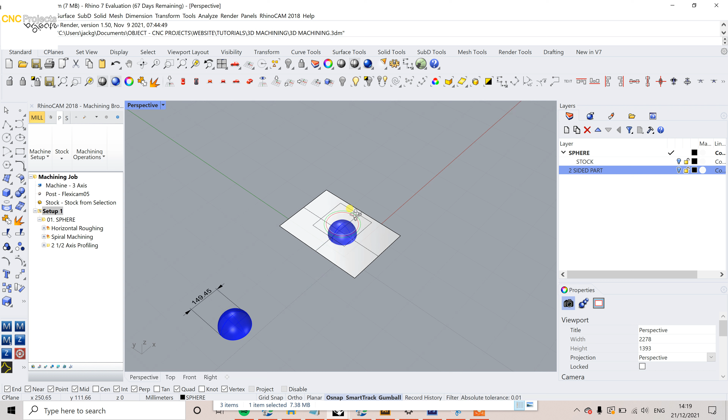So in this video, I'm just going to discuss a brief overview of 3D machining. Now, this isn't to say that I'm going to tell you how we machine the parts in 3D. There's hundreds of different ways you can machine a single part, but hopefully this video should give you an understanding of how we hold the part, why we need extra material, and just to give you a better understanding of what we require from you for those files and for the stock.

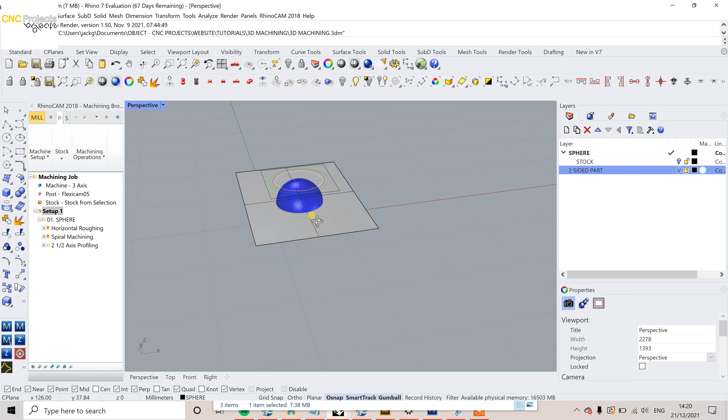So here I've just drawn a very simple semi-sphere, just as an example. It's not something we've cut recently, but as you can see, we're going to position this on the bed. Now, if we were cutting this from solid material, we've got to hold this piece down to our bed. Now, to do that, we often use mechanical fixings such as brackets and screws. If it was cut from, let's say foam, then you could just use double-sided tape and it wouldn't be such a problem.

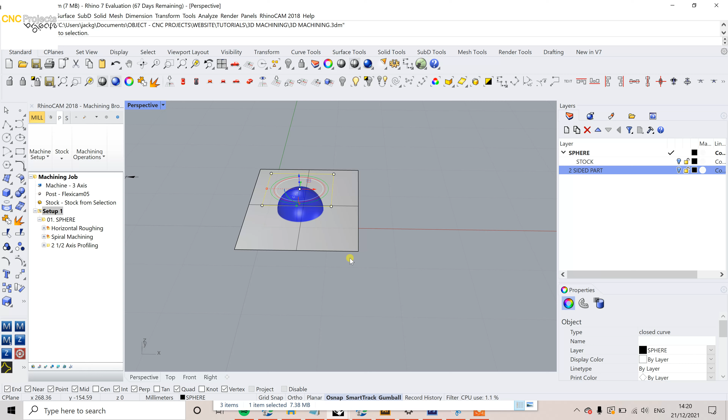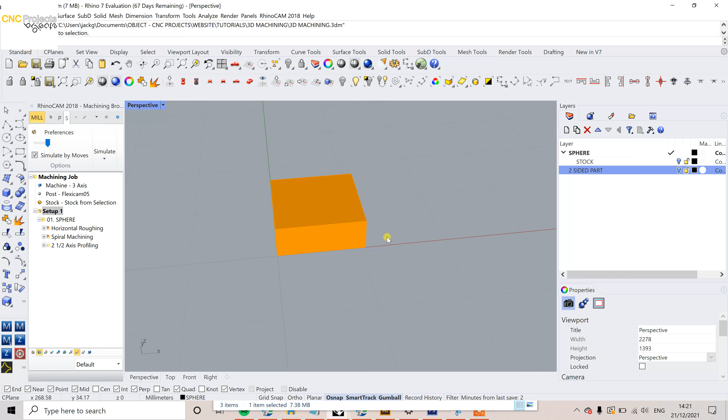But for a solid timber, the force that gets pushed through it when we're cutting is quite high. So we generally like to have a nice mechanical fixing in there to ensure that the part doesn't move around. So in here we'll have our piece of stock, and this will get bracketed down onto our MDF bed. Now, because of this, we need excess material. So although the part here is only 150 mil wide, our stock that we're actually putting within it is about 210. So we're quite a bit wider.

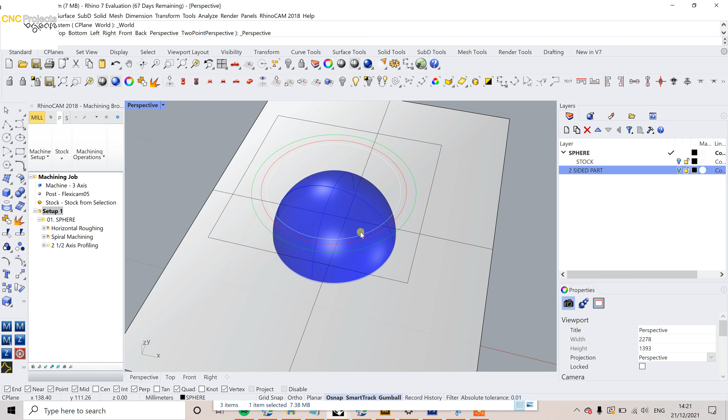Now that's because we need a lot of room for the tools to go down around this and to make sure they don't hit our screws as well. So as a general rule of thumb, what you can expect is to have about 25 mil, 30 mil basically from edge of part to the edge of your stock. If you put 30 mil all around your part, then we're not going to have a problem.

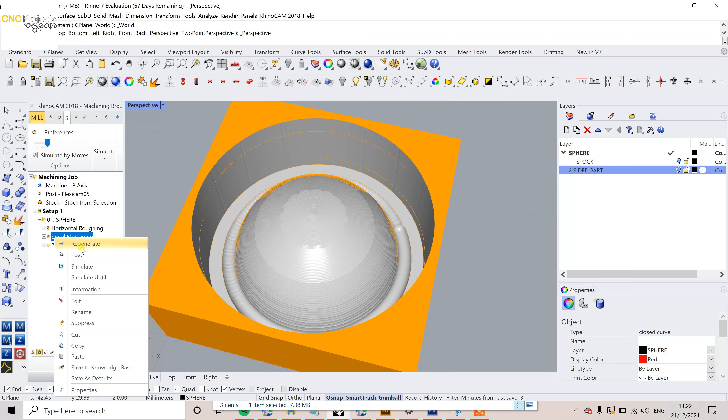So first of all, I'll just run through the simulation of how we cut this. We just rough it out and then we'd run through and do a kind of finishing operation after we've removed the bulk of the material, which would just come down in a spiral to finish this off. Now we keep that away from the bottom, and then our final pass is done with a cutter, and we'll leave tabs to hold against this frame. And again, that's just to stop the part moving around.

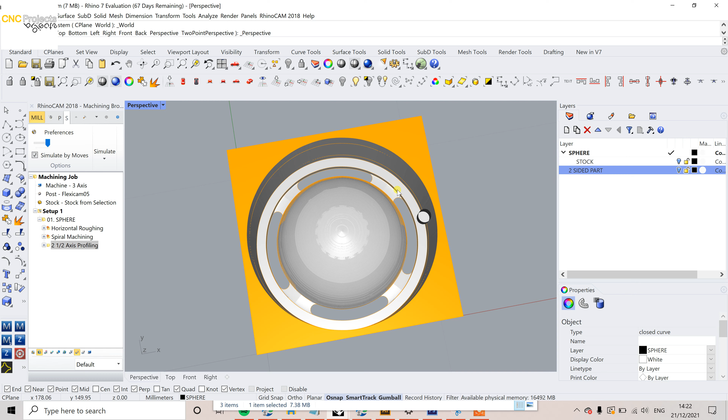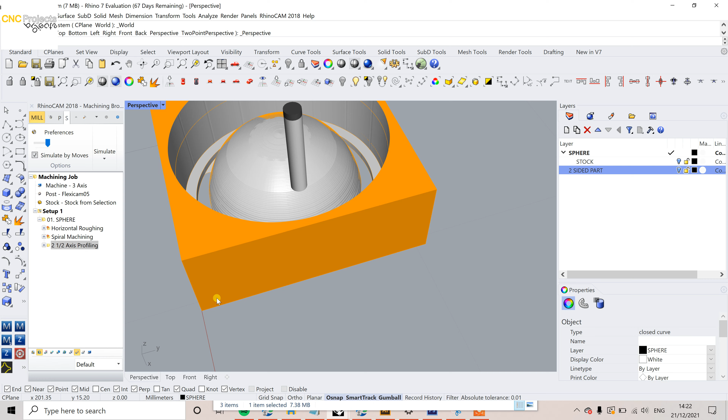These will have to be cleaned off after. Often we can do that in-house. Occasionally, as I'll show you in a sec with another part, they're going to be a lot thicker and bigger tabs, and it gets a bit more complicated. So that's a simple understanding of how we position your part within a stock and why we need that extra space. So here we put a bracket on this corner. We'd probably put one on every corner just to ensure we've got a good fixing.

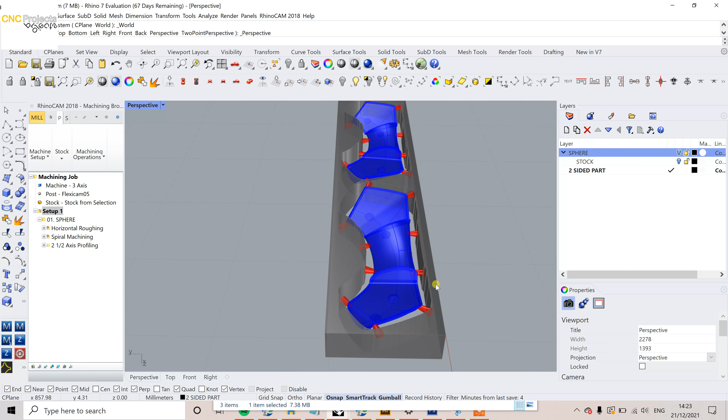Now, that's a simple 3D shape, which is only single-sided. Often we will get a more complex shape, and that will need to be machined from both sides. So here are some pieces that we machined recently. Now, as you can see, these parts have to get machined from both sides. And the way we do that is we basically hold it within this frame like an Airfix model. The blue section represents our part, and the red sections here represent our tabs that hold it to our frame.

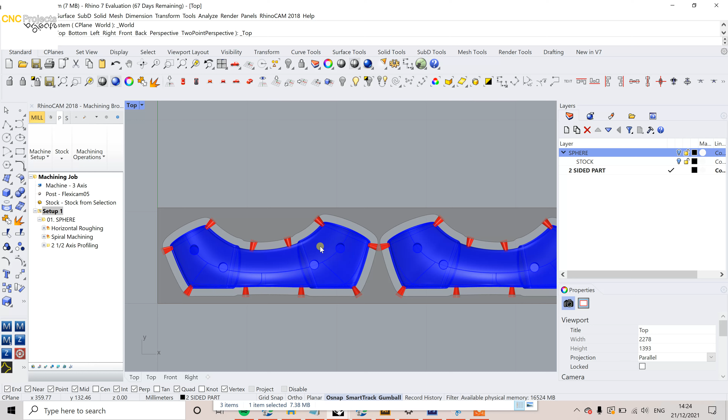Now, in order to machine this, again, we're having to create excess stock around in order for us to add our screws and our brackets. And we're also having to machine quite a bit away from this part as well. So although your part is only 120 mil wide, we're going to need another 50 mil at least around that. So don't expect, if you've got a 3D part, for us to be able to machine it from very tight stock. The more stock we have to play around with, the better it's going to be for us.

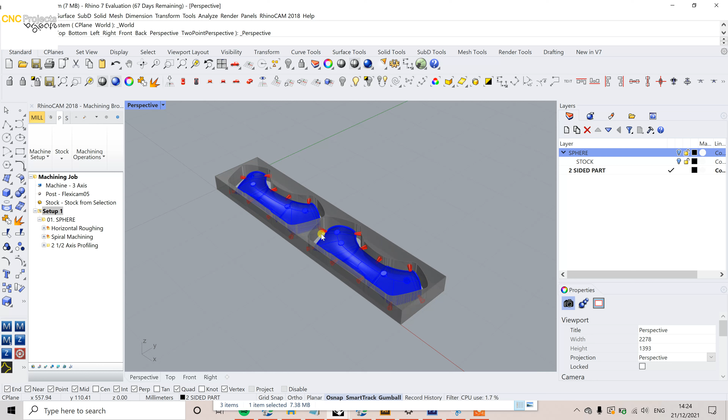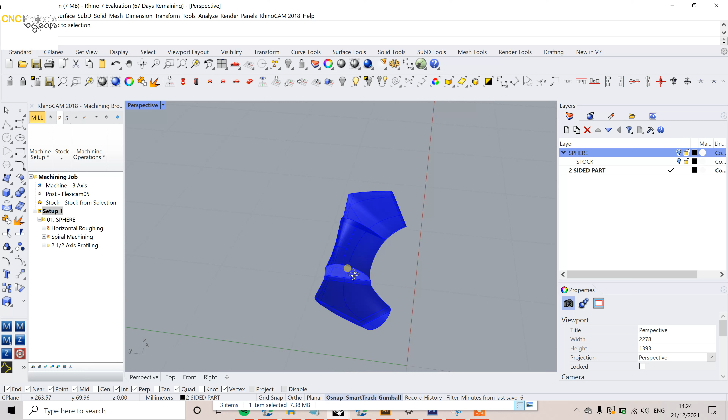Now, I'm not going to run through the programming of this because it's quite complex and there's a lot to it, and it's not really something that's going to help you. I just wanted to show you the rough layout of how we'll machine these parts. So once we've machined this one side, these parts then just get flipped over like that, and we'll then machine the other side. So this is all done on 3-axis CNC routers, so you can get very complex parts just on our 3-axis machines. We don't actually need to use the 5-axis for a lot of this kind of work.

But in some other videos, which I'll release shortly, I will be discussing setting up for 5-axis machining and the advantages and disadvantages of it. So any kind of complex parts like this, do send over to us and we can discuss through with you. Sometimes slight tweaks and alterations need to be made to help with machining, but those are stuff we can discuss on a project basis.